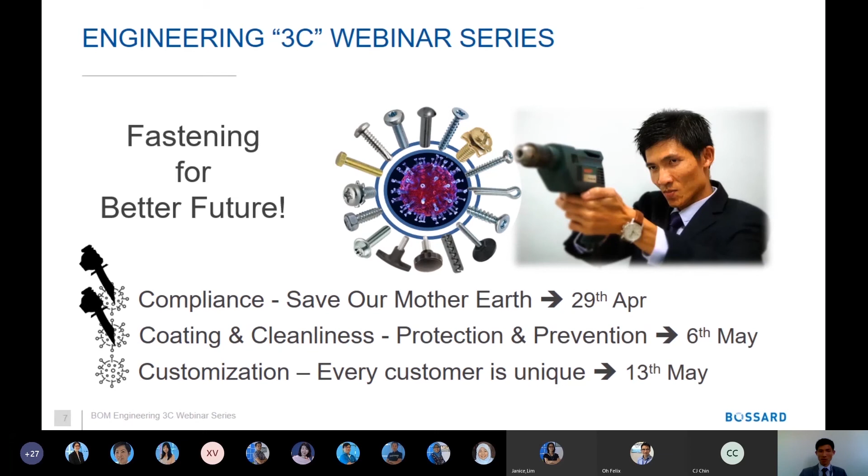And with the theme, because we are still fighting COVID, we are heading for this theme, fastening for a better future. Today we're going to address the second topic of this series, which is coating and cleanliness. We're talking about protections and preventions. Since this is the COVID-19 situation, I believe for all of us, including myself, these are the two best practices nowadays. Today is 50 days of lockdown or MCO, and we are practicing wearing masks and washing hands.

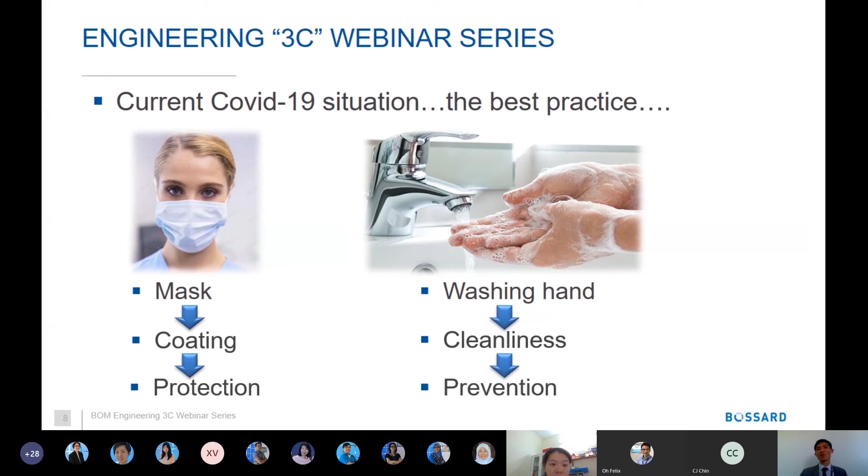How is it relevant to our webinar topic today? Putting a mask in front of us is like putting a coating in front of our face. We try to prevent or protect ourselves from being attacked by the virus. Washing hands is cleanliness. We try to wash away as much as possible all the harmful bacteria, to prevent us getting COVID-19.

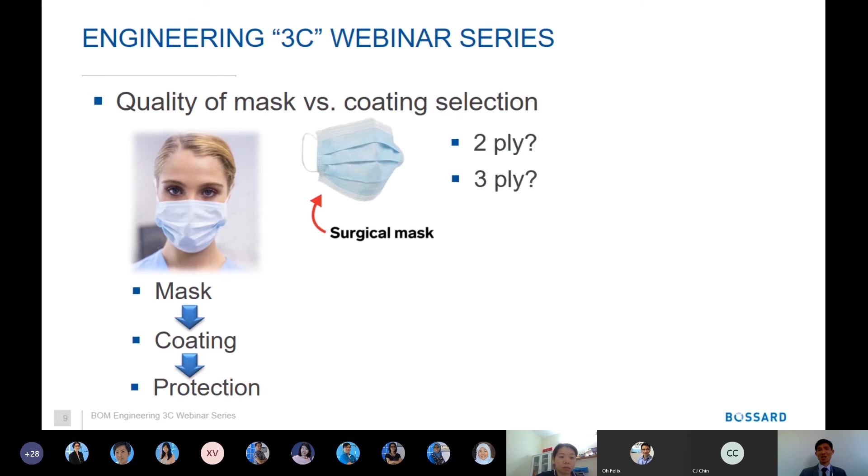In terms of mask and coating, surgical masks nowadays, I think everybody is familiar with them, either 2-ply or 3-ply, and the best, of course, is N95, but for the public like us, we don't need it. For those who followed my first webinar, I hope you still remember the coating anatomy. We talked about different layers. The first layer, the chromate layer. That was presented last week. I hope you still remember this.

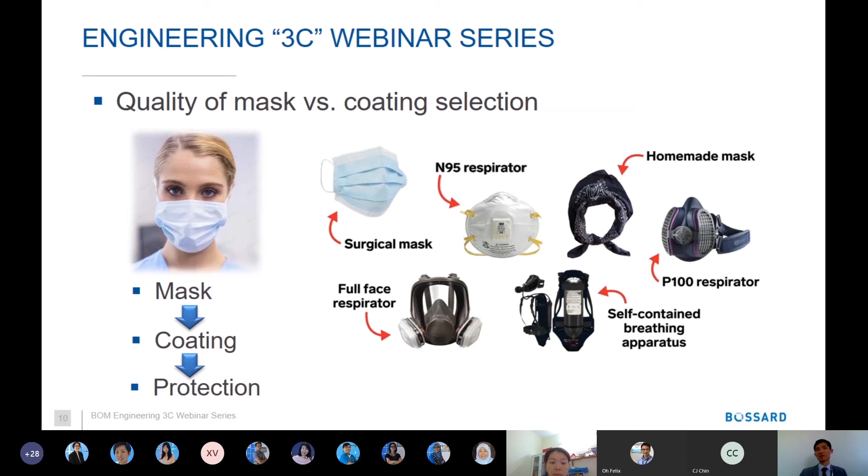In terms of masks, besides the surgical mask or N95, there are a lot of different masks. Likewise, we have a lot of coatings in the fastener industry. Wide range, different color, different performance. But we are talking about 3 things here: compatibility, resistance, and thickness. Later we explore how it goes.

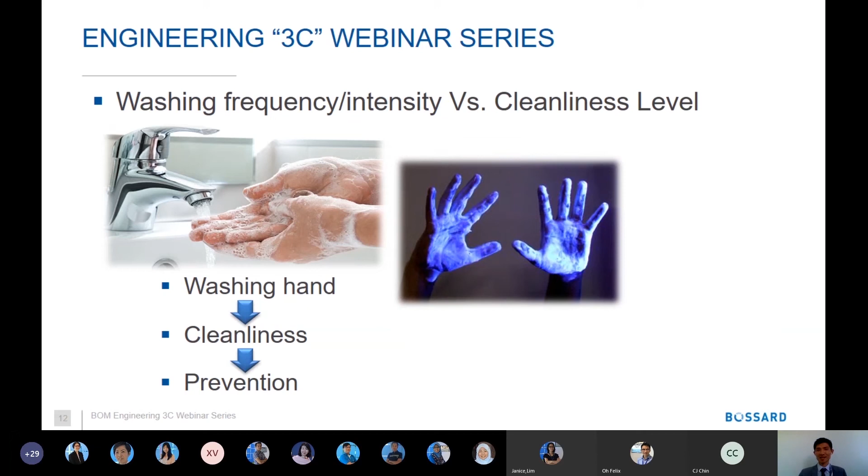Don't be scared of this hand, like a ghost hand, right? It's a hand under ultraviolet, to see how well you clean your hands. Beware, wash your hands with care. Now the question is, how clean is clean? We'll explore this later.

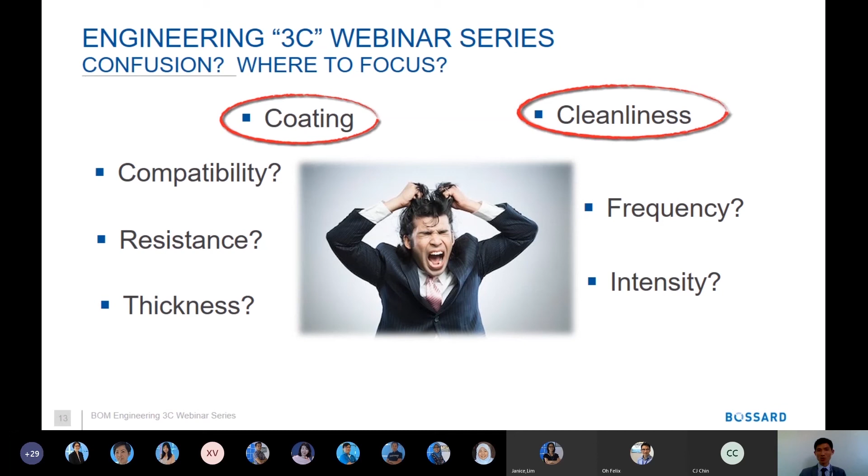But there's a feature here: coating, with compatibility, resistance, thickness; cleanliness, with frequency, intensity. Today we're talking about these 2 topics. And rest assured, nowadays masks and sanitizer will not be out of stock; they're easily available.

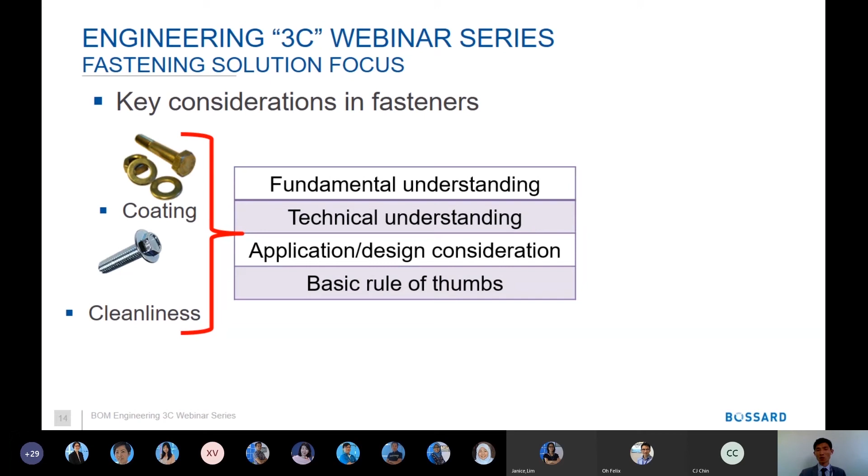The key consideration in fasteners today is a very wide topic, a very big scope. So today I'm going to touch on the fundamental, technical, application, and basic rules of thumb. A little bit here and there to explore the key considerations in fastener technology and industry.

Okay, I hope so far so good.

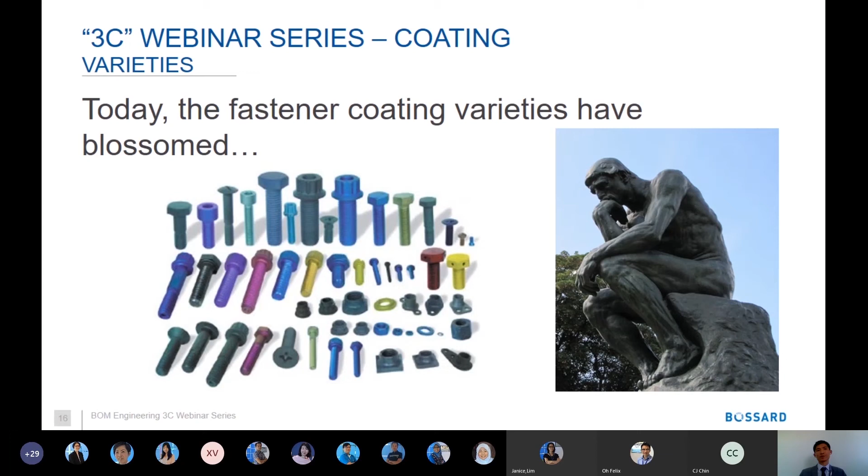We are going to move into the fundamental understanding of coating. So today, as I mentioned earlier, fastener coating varieties have blossomed, so a lot of varieties. And if you still can recall, my first webinar series talked about original zinc plating having no color. Then after chromatizing, it turned into different colors.

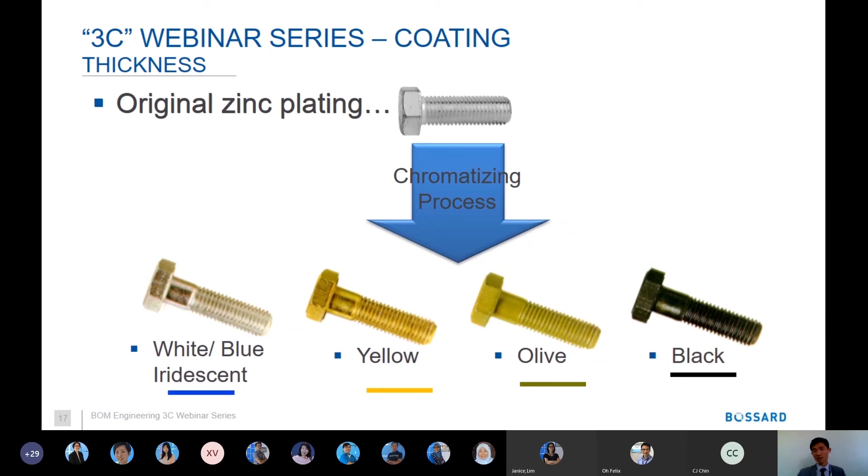Now the question is, can we plate or coat the screw with thicker plating so that it can perform better? Because I showed the chart just now: the thicker the plating, the higher the hours of resistance to rust. So yes or no? Can we plate the screw with thicker plating? Key in 1 for yes. Try the chat box, I encourage you to explore your chat box right now. If you think no, you cannot, key in number 2. I will review the answer later. I give you 10 seconds.

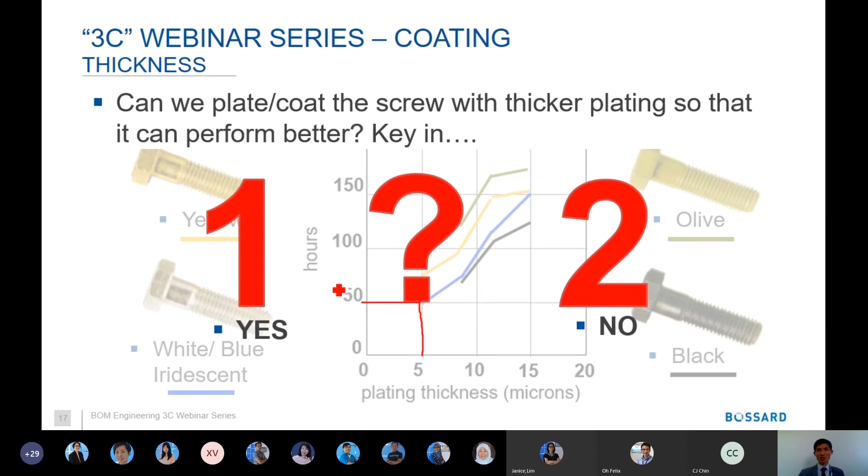So the question, I go back to this chart. 5 microns, 50; 10 micron, you can go to almost 100; 15 micron, you can go up to 150. So can we plate thicker so that it can perform better? Small screw with thick plating to increase salt spray test. Let's say a customer has an M3 screw and asks Bossard, can you give me this screw with 500 micron zinc black plating? Oh dear. I'm just afraid that instead of a zinc black plated screw, it will become a black stone because it's too thick. Of course, this example is too exaggerated.

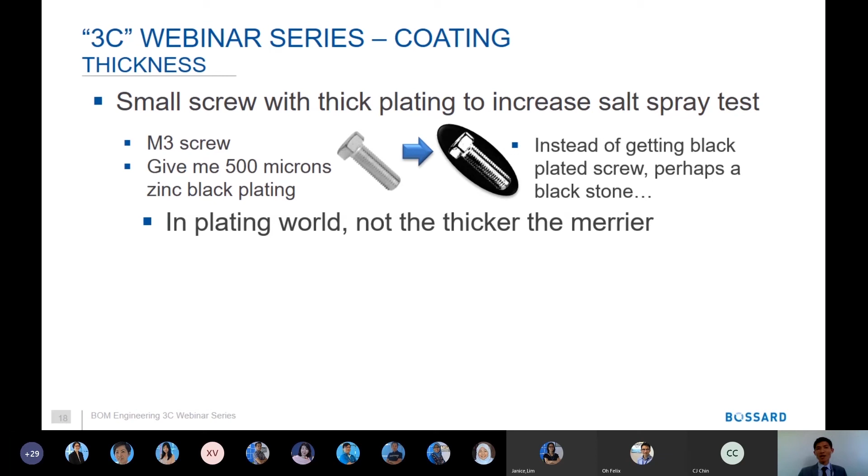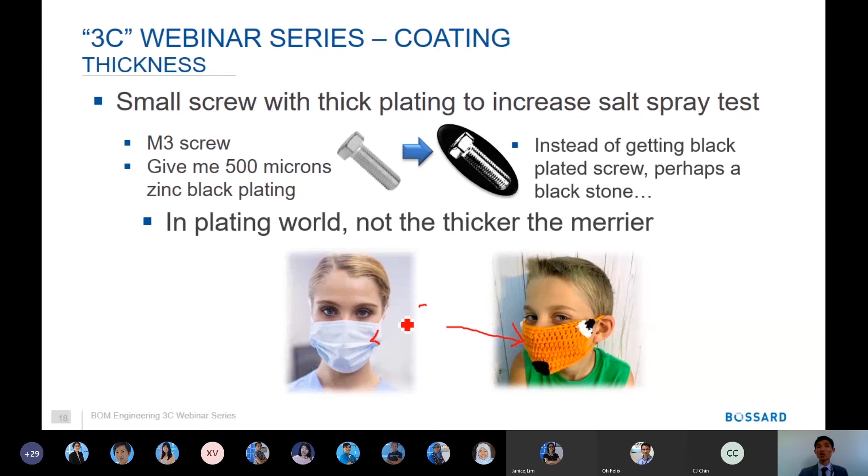In the plating world, it's not the thicker the merrier. There's a guideline behind it. Just like wearing a mask: a beautiful lady wearing a proper surgical mask. Do you need a very thick mask? Compared with this cheeky boy wearing I don't know what kind of material, very thick. Which one is safer? So in terms of performance, not the thicker the merrier. There is a standard that should be respected, with different plating and different sizes of screw.

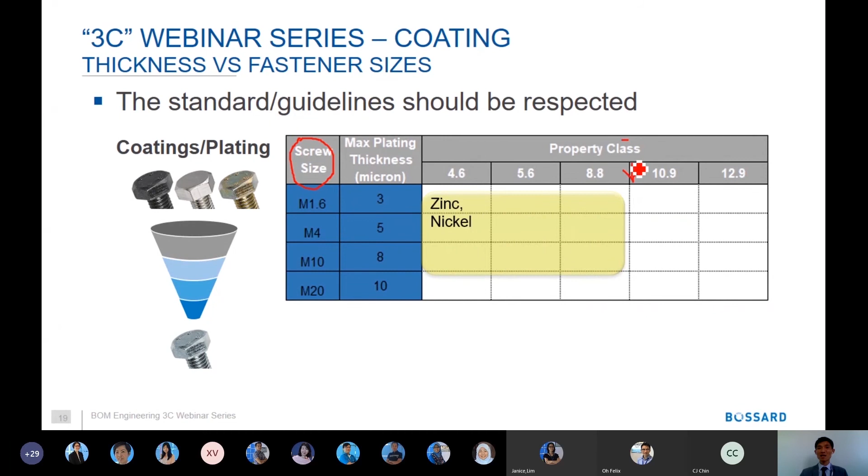This is a simple table. I compare the size of screw from M1.6 to M20. The maximum plating thickness allowed is from 3 micron, 5, 8, and 10, depending on the size. And over here is the property class. In general, for property class less than 10.9, you can have very common zinc or nickel plating up to M10. But if you want to plate beyond 8.8, you should have phosphating. The reason being, if you electroplate this property class, you could have an HE risk.

Sorry for my handwriting, I'm using a mouse to write this. HE is hydrogen embrittlement. I will not elaborate more, but this is a silent killer, one of the biggest risks in the fastener industry. If you use phosphating, it's okay. And if you have bigger bolts, M20, you can plate maximum 10 micron or even more, depending on the size. Hot dip galvanized is allowed. But if you want to avoid HE, you have other options: Delta Tone, Geomet. This is not electroplated, so it can safely be applied for 10.9 and above.

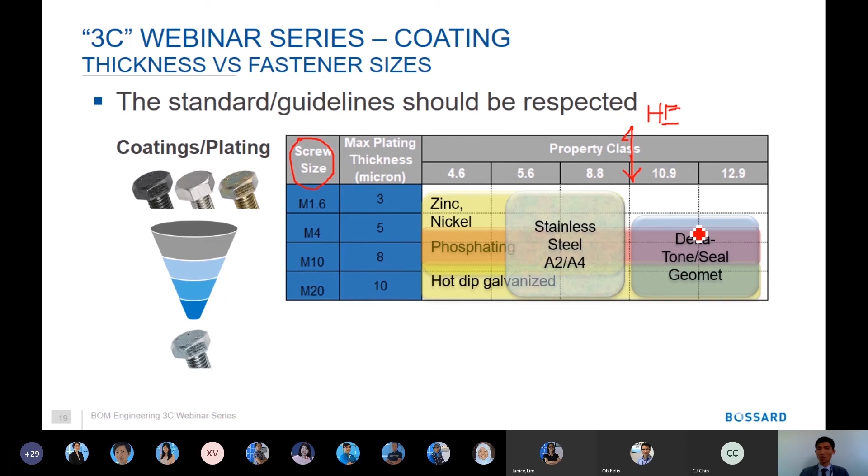And if your product allows a higher grade, sometimes your fastener does not necessarily need to be plated. You can choose stainless steel directly. No plating needed; the stainless steel material itself is good in corrosion resistance. Later we'll talk about stainless steel.

So mask and coating, I believe you have a brief idea. We wear masks to fight COVID-19. Now we apply coating on fasteners. What are we fighting against? Yes, I'm asking you questions, but I'm going to answer myself, if you have an answer in your heart now. If you apply coating on a fastener, what are we fighting against?

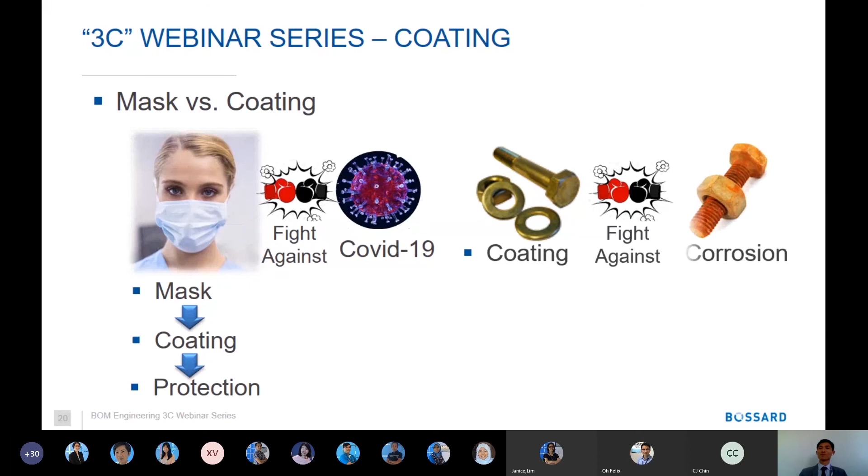Corrosion. Okay, how can corrosion happen? Not because we choose one material, zinc plating, not good, you corrode. Okay, there's a lot of material according to this periodic table. A lot of material, zinc is just one of them. Nickel, cadmium, etc. Okay, material is only one of the factors. Material failure is not necessarily the material's fault.

It could be the environment. Are we using the product in the right environment? Okay, is it outdoor? Is it indoor? Is it a harsh environment? Is it high humidity? So this needs to be considered.

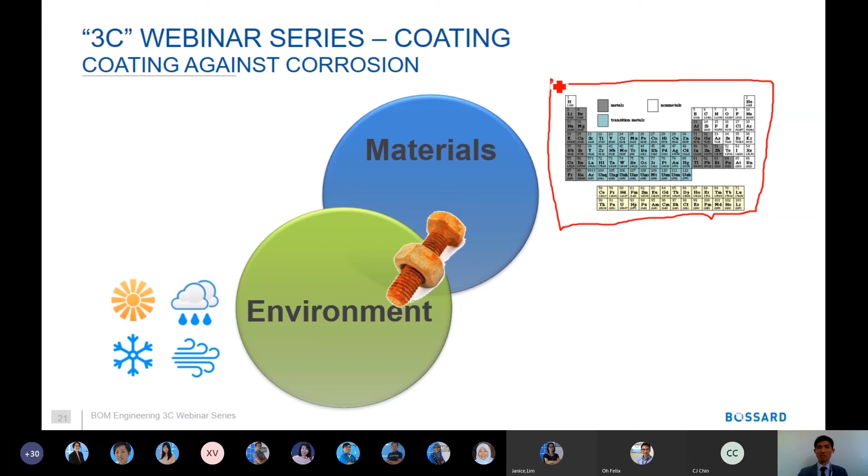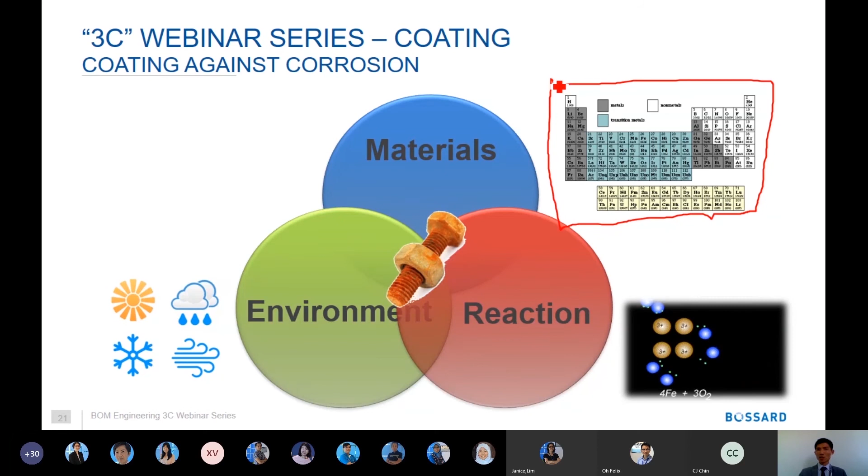And of course, last but not least, reactions. You have material, you have environment. There will be reactions. Okay, rust. We are talking about ferrum oxide. When ferrum interacts with oxygen to form ferrum oxide, it's called rust. So these three factors must come into the picture to enable corrosion. Okay, so I hope that gives you a little bit of a picture. Not only the plating itself, three factors must come.

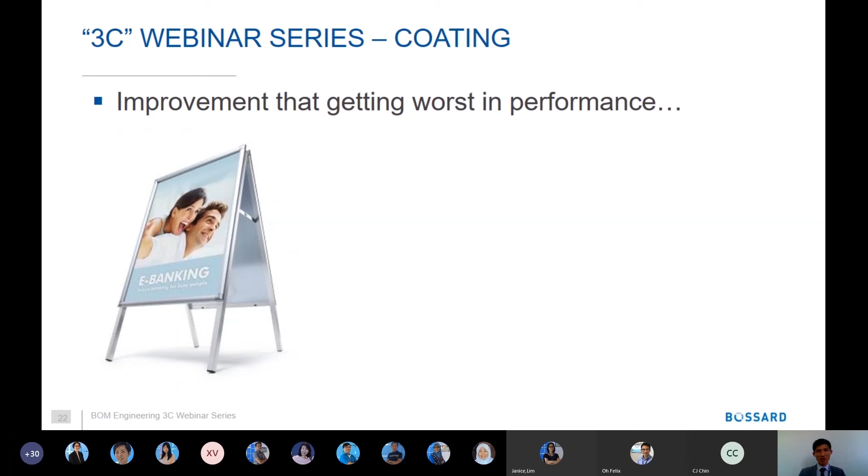So let me quote you a very interesting example. We have one customer that makes LED boards. The board that you see at any restaurant, any outlet, they put it outside for the promotion of the shop of the day. The statement I put here: improvement that gets worse in performance. Why do I say so? Initially, the customer just assembled this board with this joint here, with a zinc plated screw.

Because it's put outdoors, in an outdoor environment, the zinc plating started to have a little bit of rust. As you can see here, a little bit of rust. The customer said, not good, because the end customer complained. Can you do something? According to my understanding, stainless steel is the best. So the customer just changed to stainless steel. Oops, you can see, worse. How come?

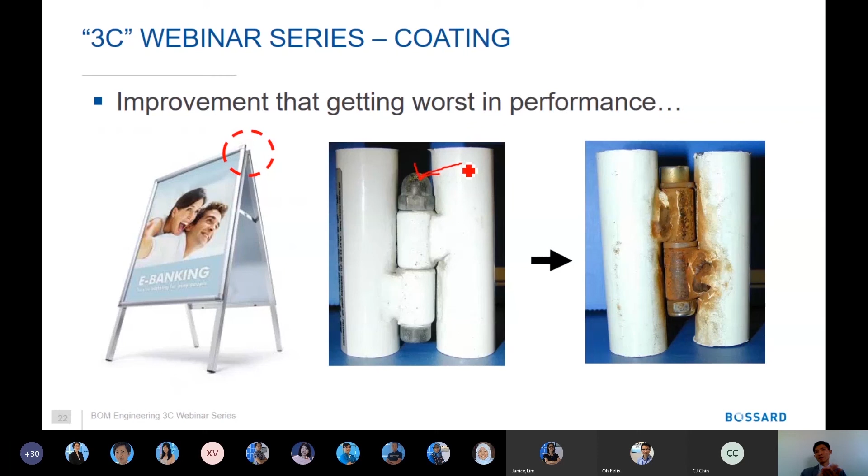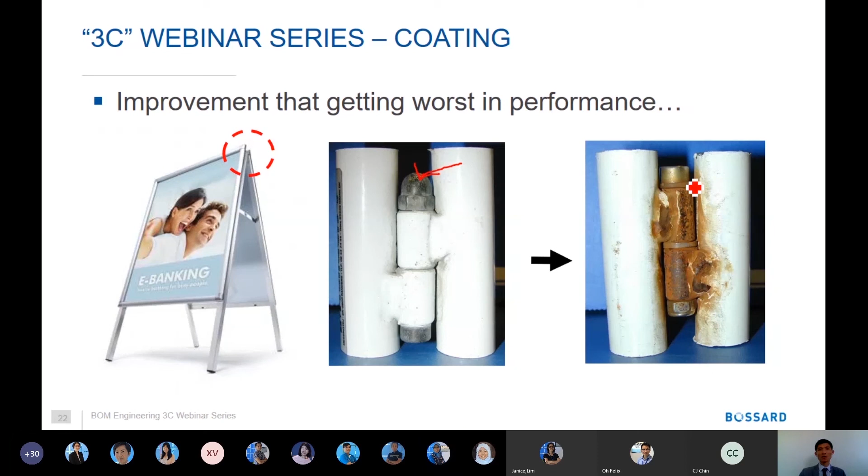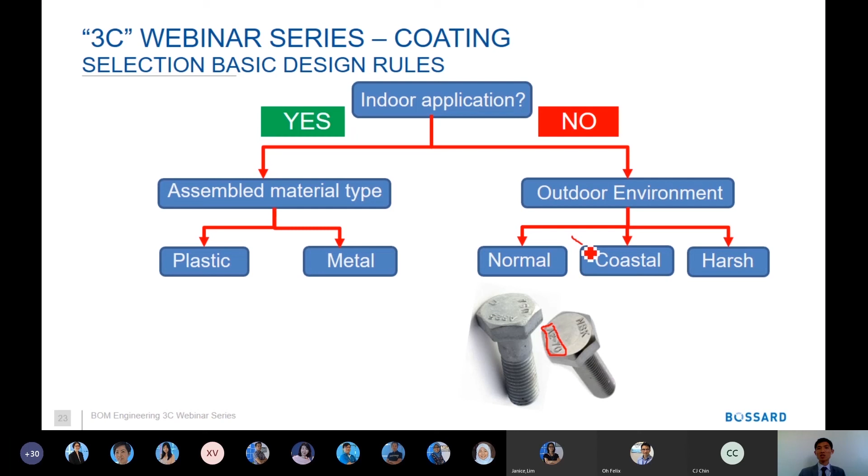Indoor and outdoor application. This is a short basic design rule. If you are using it outdoors, let's take the outdoor route. You can choose hot dip galvanized. It's a little bit ugly because it's used outdoors. But if your product is high end and you want something better, stainless steel is always better. In this case, as you can see, a small marking here, A2. But if your application is close to the coast, like Penang Island, near the seaside, you should use A4 type stainless steel.

So it's different. A lot of the time, being a professional, I look at outdoor applications and how they fasten the joint or the structure. They use A2 close to the seaside. Oh, I know, it's designed to fail, because A2 stainless steel will fail when exposed to a seaside environment. And then harsh environments, we're talking about different chemicals or high humidity and temperature. There are different coatings, Teflon, Geomet, things like that.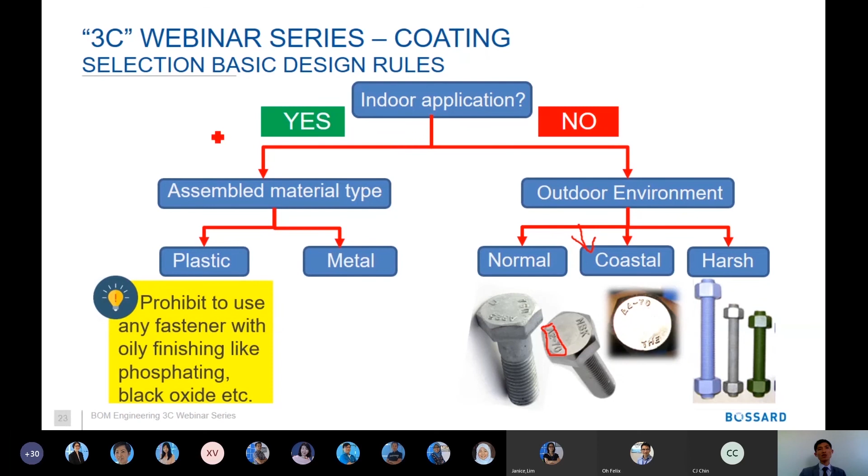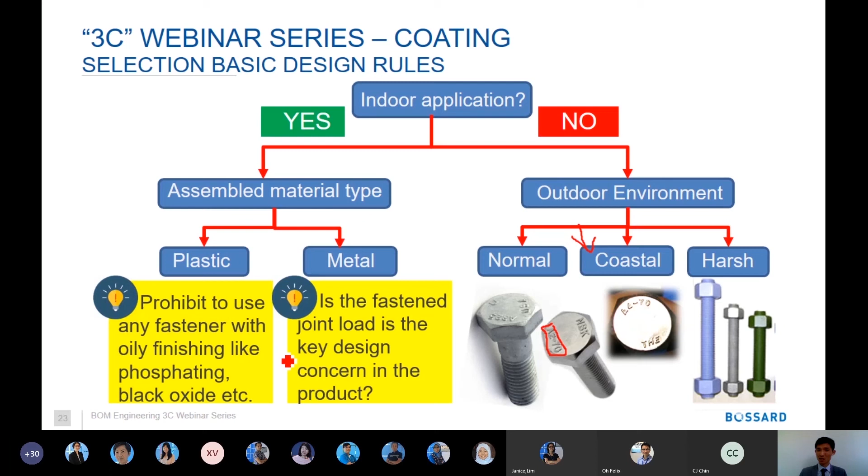If you are looking at indoor application, you need to consider the assembled material. If it's plastic, don't use a fastener with oil finishing because the oil residue will react with the plastic. Metal: the fastened joint load is a key design concern in the product. That's another aspect. In fact, these are very simple guidelines; the total picture of this selection is a bit more complicated, as you can imagine. We have no time to explore one by one what is yes and what is no. So I go back to the three factors: material, environment, reactions. It's very important.

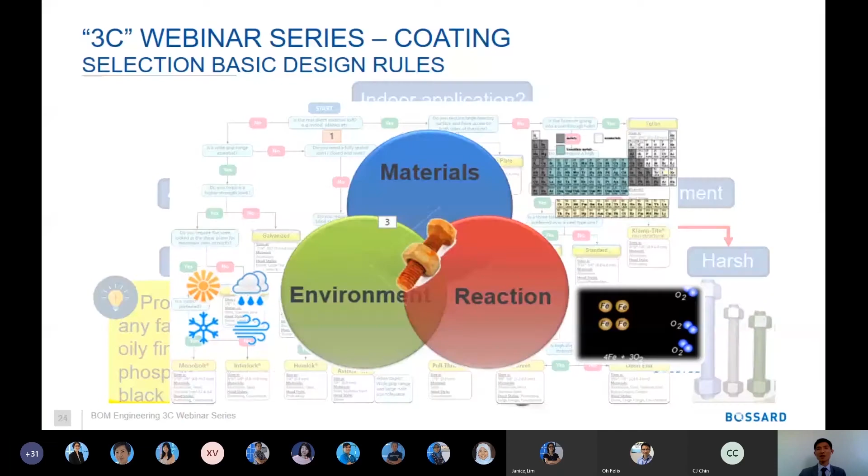With that, I end my fundamental understanding of coating. Now I'm moving to another topic, the second topic, cleanliness. Okay, cleanliness.

If you break down the cell phone, you can see a lot of small components. All these components are very sensitive to microscopic particles. Even a particle of 500 micron, 200, or even 100 micron can cause a malfunction of the product. Therefore, technical cleaning is increasingly important in the design and production of fasteners for fastening technology.

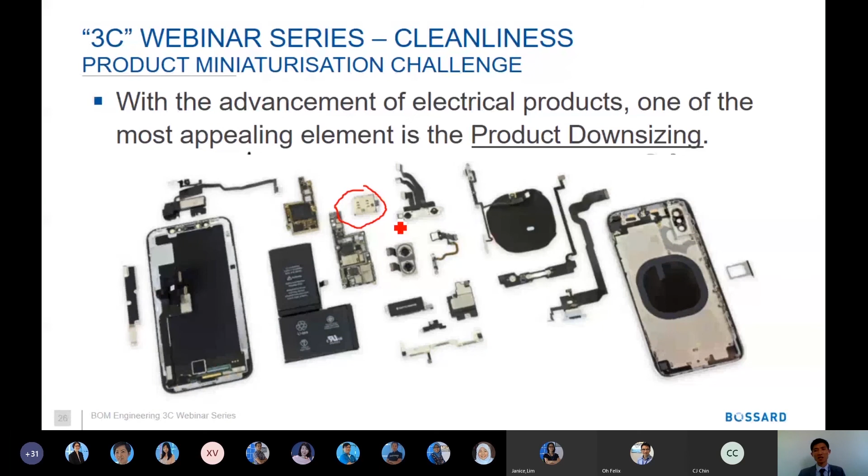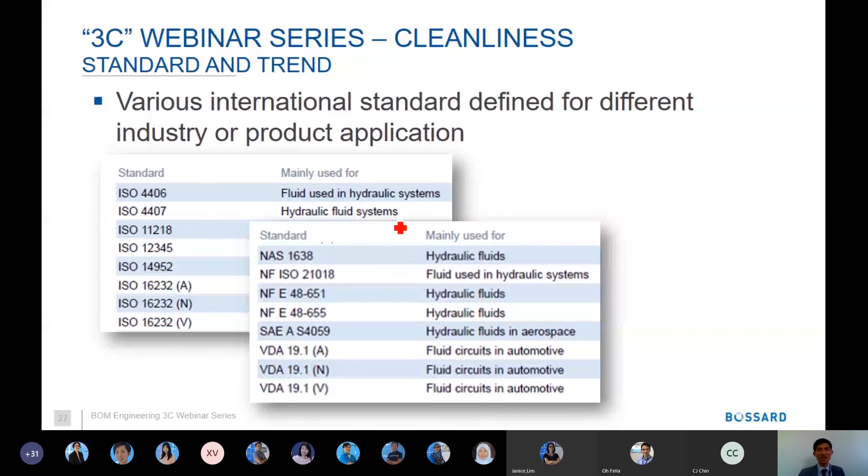There are various industry standards defined for different industries, according to ISO and some specific industry standards, for example VDA, for different applications. In earlier years, cleanliness only applied to microelectronics, medical, and food products. But nowadays aerospace and automotive also have this requirement, because more and more microelectronic chips are built into the product.

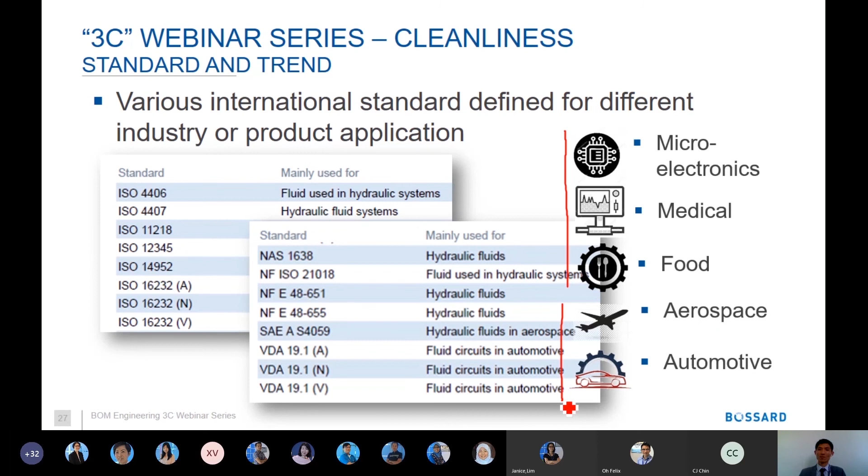A car one day is no longer just a car. It's a movable computer or laptop, whatever you call it. An autonomous car. So when you have a cleanliness requirement, you should have a clean room. A clean room is defined as an environment where airborne contamination is controlled to a level appropriate for accomplishing contamination-sensitive activities. Sorry for the technical definition.

There is a good standard you can refer to, ISO 14644, which defines different clean room classes, ISO 1 until ISO 9, against different particle sizes, 0.1 up to 5 micron. So imagine, participants, close your eyes. You can imagine a box of space and see the particles moving. I know it's tough, sorry.

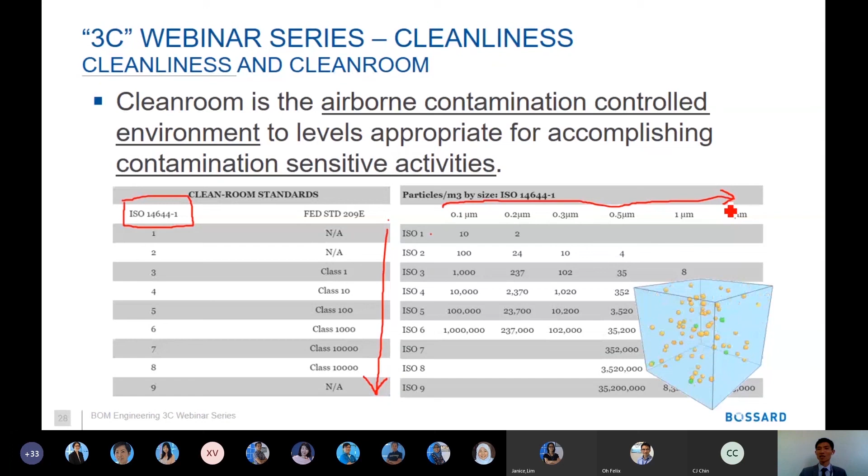So I'll give you a box. Look at my slide. A 1 meter cube box. I capture the particles and make them visible. All these are particles. Depending on how many particles are counted in that box, you define your ISO clean room class. The higher the class, the smaller or fewer the particles. In ISO 1, the particles are very small or fewer.

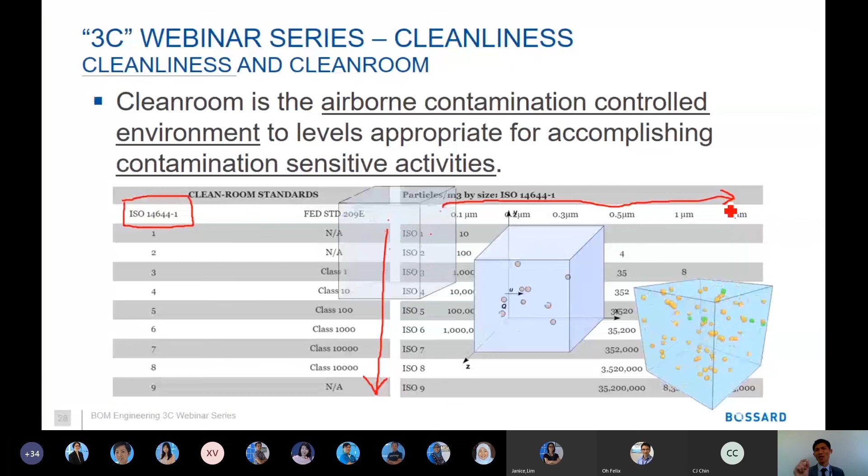So, clean room setup. For people who never worked in a factory, this so-called clean room may be strange to you, but I have experienced it. It's very clean. I'll give you a short video clip so that you can understand a bit of what is called a clean room. Hold on.

Okay, I play the video now. Oops. Sorry, there's some technical issue. I replay the video.

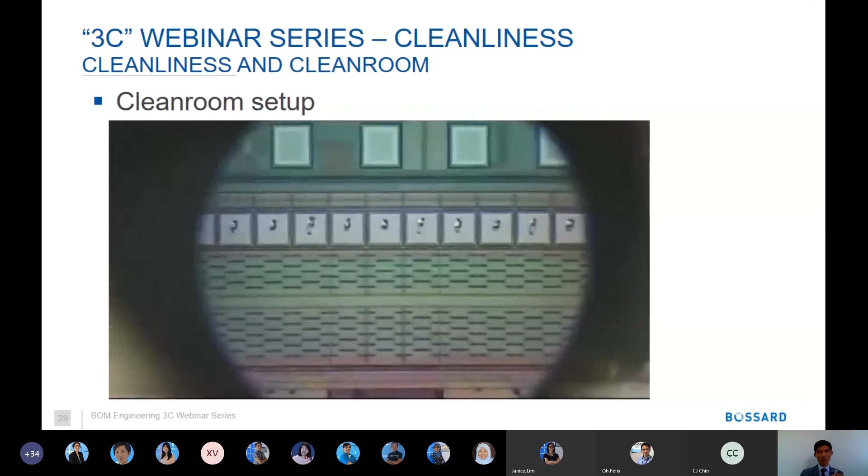Just a short video illustrating clean rooms and other design considerations. In clean rooms, you can see a lot of people wearing what we call smocks, or in my term when I was in a factory, monkey suits. You look like a monkey when you wear these suits. On the right-hand side you can see a blue one. Nowadays, because of COVID-19, this kind of outfit is no longer strange to you because a lot of our frontline medical staff are wearing it.

In industry, when you wear this, you are protecting the product. You don't want your product contaminated. But in the medical line it's different: we are protecting human life against COVID-19. These are the differences. Some people say, what? Products need to be protected rather than humans? Well, we need to think about it, but it's because the product is sensitive to particles, as I mentioned.

I'm not an expert in clean rooms and don't intend to teach you how to set one up. But now we're looking into the screw. Anything special about this screw? Those not familiar with screws would say nothing. But if you look under a microscope, a lot of things can be deposited onto the screw: volatile organic contaminants or airborne molecular contaminants.

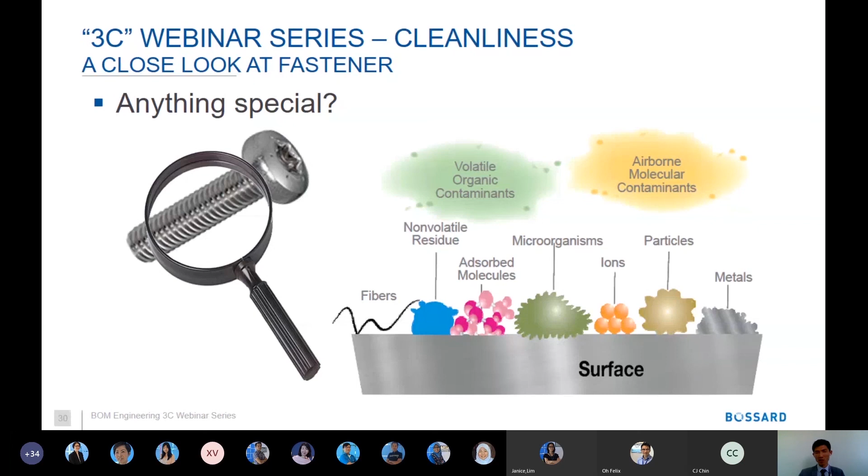It can be fiber, ion, other particles, or even metal chips. Sometimes after screw manufacturing, there are certain microchips residing in the screw. So how do we clean the screw?

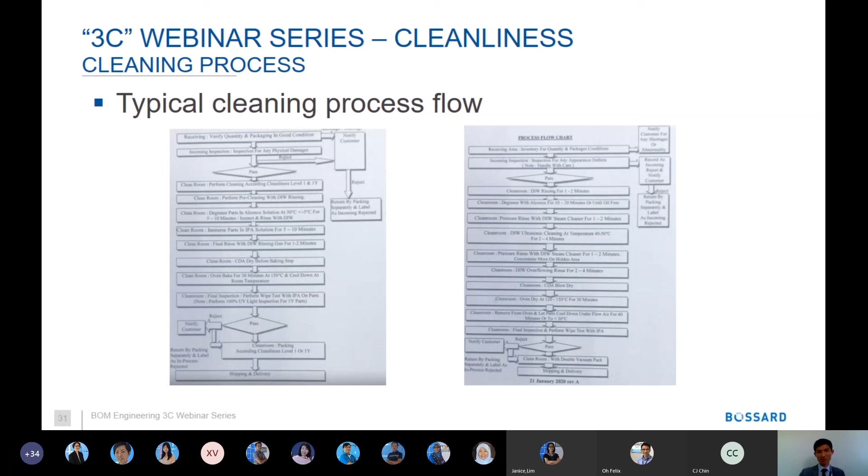There's a typical process flow to clean the screws. You can't see very clearly on these two processes, I purposely blurred it because this is a bit P&C with our partners, but don't worry, I'll show you this diagram and some key features of the cleaning.

You subject the screw under a special cleaning agent. There are a lot of cleaning agents in the market. Then after that, you subject them to pressurized rinsing a few times depending on how much you want to clean. Ultrasonic cleaning here is not normal ultrasonic cleaning, it's at elevated temperature. Then after that you have double vacuum packing.

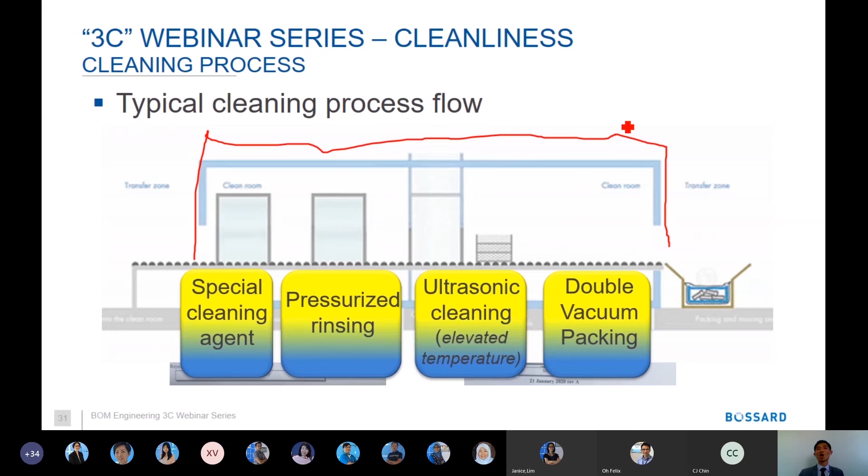So throughout this process, what's more important? Let me pull out my pen first. This environment - because you want to clean the screw, this environment also needs to be clean. It's a clean room environment.

So just now we were talking about washing. The question is, how clean is clean? So cleanliness inspection ranges from visual to visual-assisted inspections.

The normal inspection that a lot of companies practice is through visual inspection. The inspector must be well trained in this case. Some visual enhanced tools, good lighting may be needed - no chip, no foreign particles. These are very subjective. A lot of times we have some so-called good arguments with customers on whether this is acceptable or not.

But some customers use a different method, like wiping test, which is widely adopted by a lot of clean room environments, according to some standard like ISO 14644, etc.

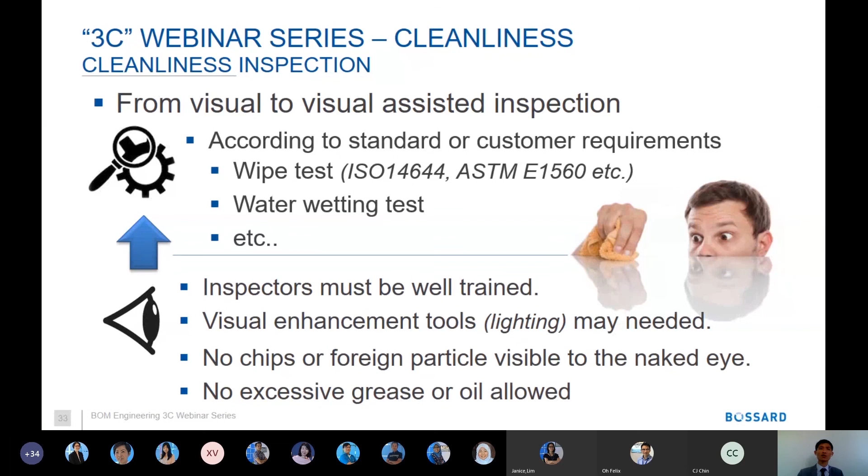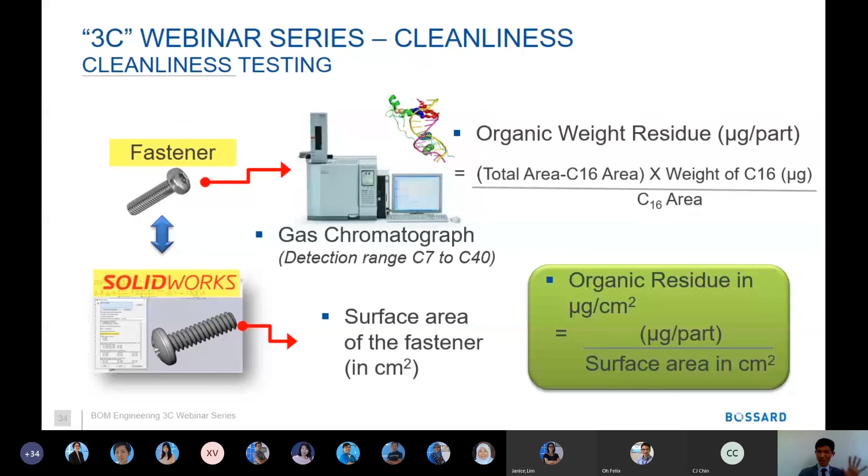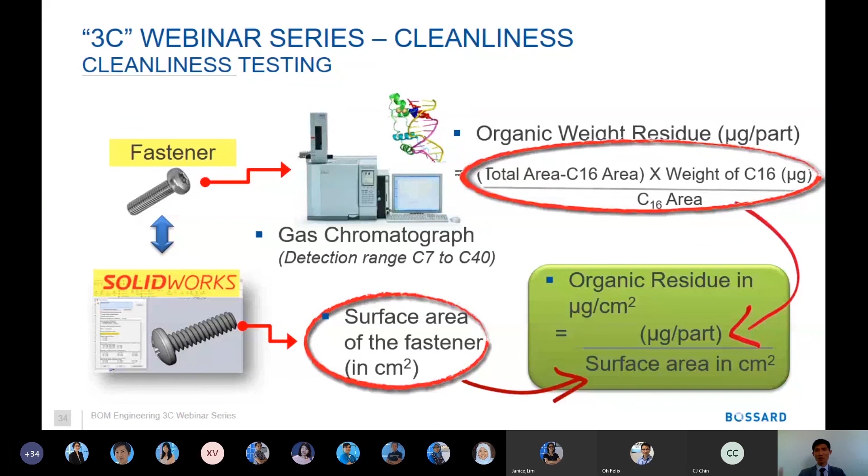Then every part will have a drawing, a 3D drawing, which will determine the so-called surface area of the fastener in centimeters square. So after that, there's a formula to calculate the organic residue in micrograms per centimeter square. Once you get this figure from the lab, and you have the surface area, you just divide these two figures and you get the organic residue in micrograms per centimeter square.

So recently we've done one organic residue test for one of our projects in Penang, where we supplied certain fasteners for the project. The upper limit of the organic residue in this case is 9.7 x 10^-6 gram per centimeter square.

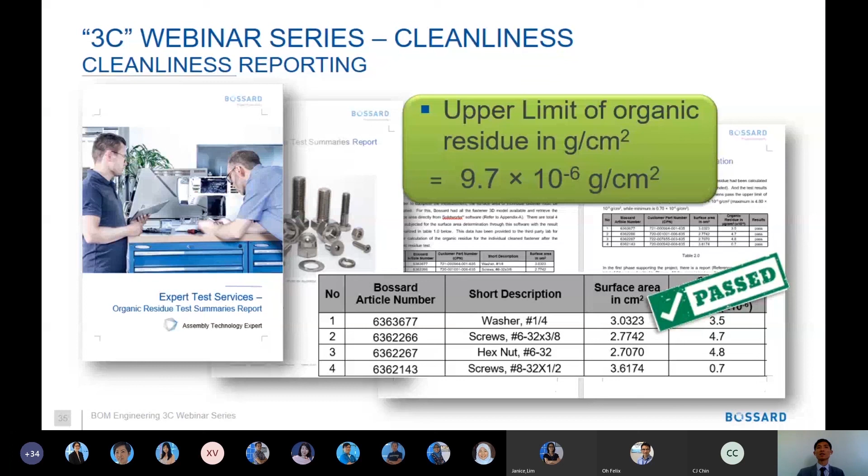Based on the part that we supplied to them, as you can see, it's 3.5 - not even half of the upper limit. So all the samples tested passed and were supplied. So this is from the organic residue testing standpoint.

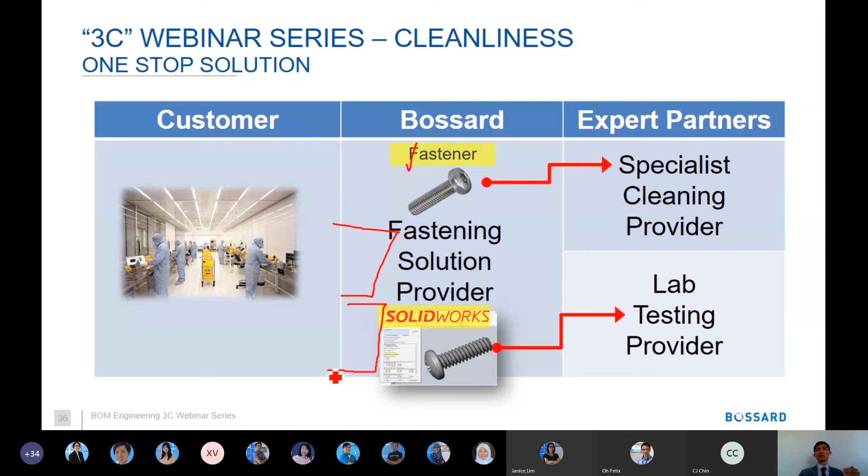So for the customer, they no longer need to deal with the fastener supplier separately, and the cleaning supplier separately, or testing lab separately. They can deal with someone who knows how to get in touch with the expert partner. In this case, we not only supply the fastener, we know where to clean it, we know the lab who can test it and provide the right figure. Then we can calculate and compile what they call the reports to our customer - one consolidated report to streamline the supply.

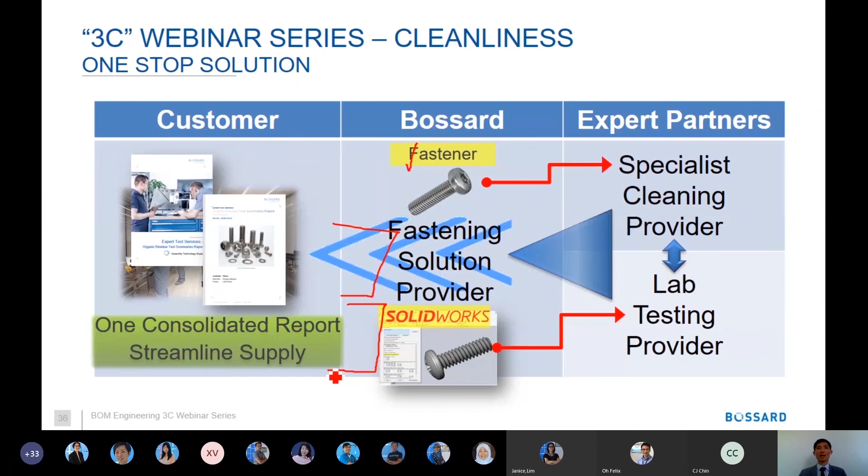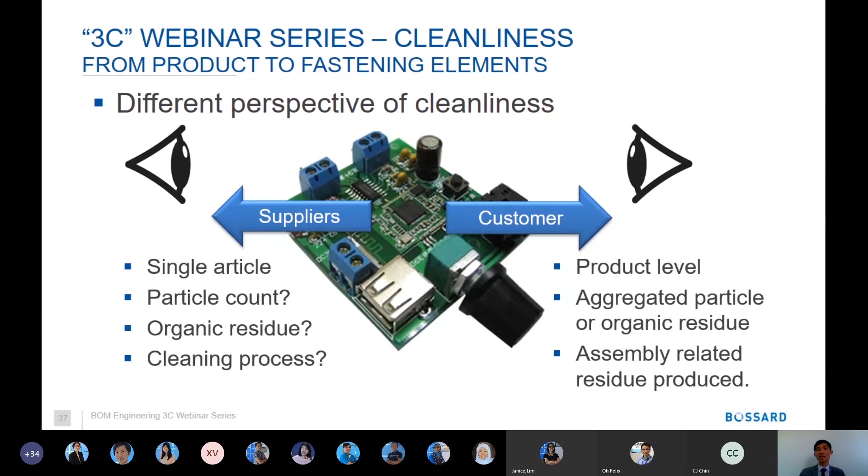From the customer's point of view, it's product level, obviously. You're not looking at the single article, but the aggregated total particle counts or organic residue. And finally, but also very important, assembly residue - this can be generated during your assembly, putting the product together.

So to sum up, I'll give a summary of this on my webinar today.